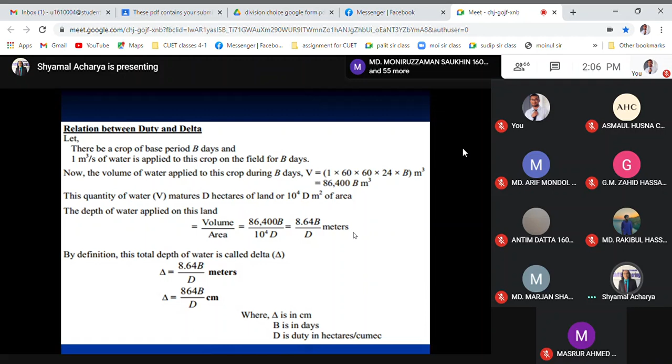And there is a relationship between this duty and delta, depth of water and number of hectares of land with 1 cumec discharge rate. And this relation is delta equals 8.64 B divided by D meters, or 864 B divided by D centimeters. And related to this, duty is varying.

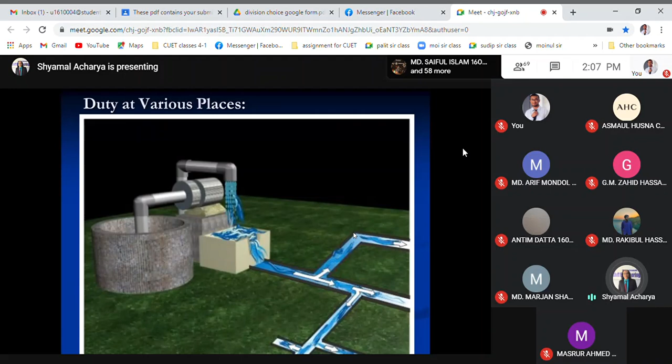The position of the canal system very close to the irrigation field will give you the maximum duty, and the farthest position will give you less duty, because there are different types of losses in between the passages in the canal system. So at source the duty will be less. Close to the irrigation land, that will give you the maximum duty.

And importance of duty was discussed, and we could also improve the duty of water by taking two types of precautions: in field preparation and sowing, and also precautions in handling irrigation supplies, we can minimize the losses.

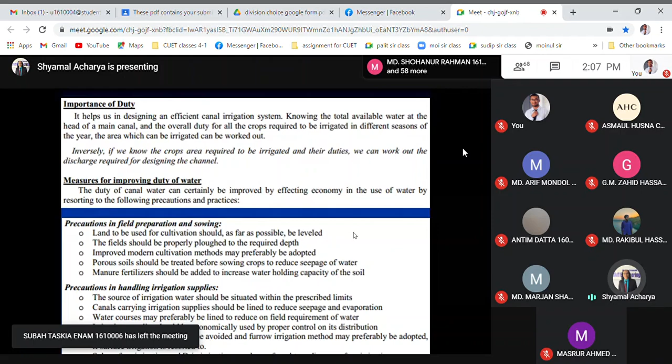Now, each crop has its own sowing and harvesting seasons, and it is important to have the knowledge of this, which may help to decide the total water demand in the field having mixed crops. You might know this, there are two main seasons, Rabi season and Kharif season. This is actually the starting of the Rabi season. Not right now, it started a few days back.

Rabi crops are, say, potatoes or cabbage, cauliflower, these types of vegetables. Brinjals, radish. All these types of vegetables are basically called the Rabi crops, which actually need maximum irrigation water. Without irrigation, it is not possible.

But the Kharif season is mainly in monsoon times, and mostly the water is coming from the rains. As you know, in our country, after April up to October, we can see the rains. And after October to March, or even up to the mid of April, there are no rains, only superficial rains in our country.

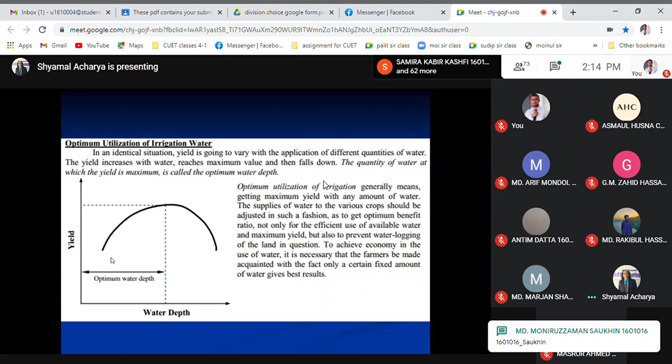The quantity of water at which the yield is maximum, that amount of water is basically called the optimum water depth. I already gave you one example of this type of experiment in your level 3 soil course, that is maximum dry density versus optimum moisture content. This is more or less the same. Optimum water depth gives you the maximum yield. Less than this depth of water will reduce the yield of your crop.

Now come to the use of water. Basically, for the consumptive use, this is called the CU. And this consumptive use is basically consumption of the water in the irrigation field or crop field by two processes. One is evaporation, another one is transpiration. What is transpiration? Can anyone tell me?

Transpiration, as it is written here, is water entering into the plant roots, used to build plant tissues, and being passed through the leaves, the stomata, of the plant into the atmosphere. This process of water transportation is called transpiration. The water enters the plant roots, then gradually moves upward, building the tissues of the plant, and finally through the openings of the leaves, called the stomata, leaves into the atmosphere.

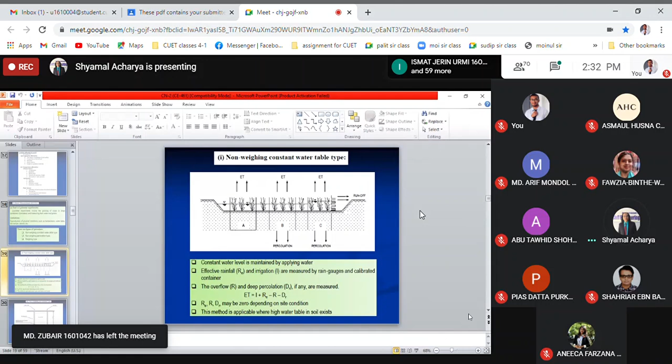Overflow, deep percolation, if any, are measured using this equation. Maybe 0 effective rainfall, overflow maybe 0, and deep percolation maybe 0. This method is applicable where a high water table in soil exists. This is the non-weighing type with percolation.

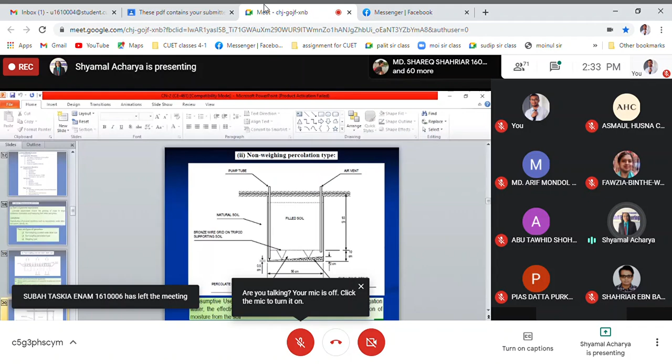Consumptive use in this way can be computed by adding measured quantities of irrigation water and the effective rainfall received during the season from the rain gauge and the contribution of moisture from the soil. And this is that equation. There is MBi and MEi, moisture content at the beginning of the season in a particular layer.

This soil zone can be divided into a number of soil layers. In a particular soil layer, how much water is available can be measured by a moisture content experiment, by calculation of moisture content. And this is done at the very beginning of the season, and after the season once again the moisture content is calculated.

So there could be many layers, 1 to n layers, the difference, multiplied by the apparent specific gravity of the ith layer and the depth of the ith layer zone. This will give you the difference in moisture content, and irrigation water, effective rainfall, and deep percolation. This is addition, this is used, and this is the remaining. So this will be the amount of calculated evapotranspiration.

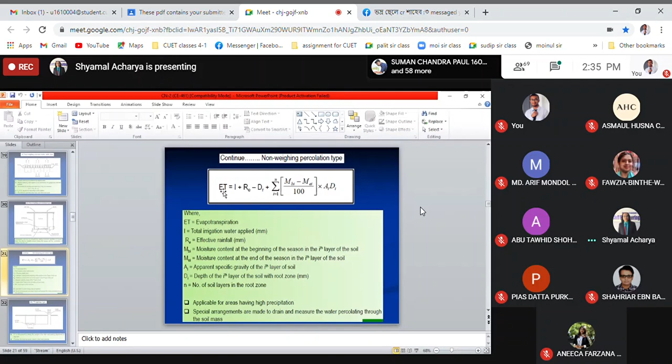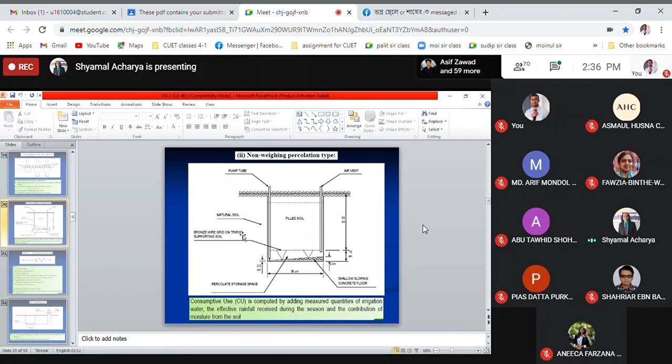There you can see application of water or rainfall. There could be some surface runoff, there could be some deep percolation, and there will remain some moisture in the root zone, and at the same time evapotranspiration will be happening. And knowing all this, irrigation water, how much water you are applying, you can easily measure.

Runoff, the amount of water that is running off from the surface of the land, you can easily measure. Rainfall, if there is anything, from the rain gauge you can easily measure. Deep percolation, knowing the permeability of a particular type of soil for a particular irrigation field, how much water could be percolated into the deep percolation zone, you can easily calculate.

And remaining moisture content can be calculated the previous way. Moisture content at the first sampling time in a particular layer, and moisture content in the second sampling. This could be at the start of the season, this could be at the end of the season. In between, how much water is depleted, that would be the available moisture in that particular zone.

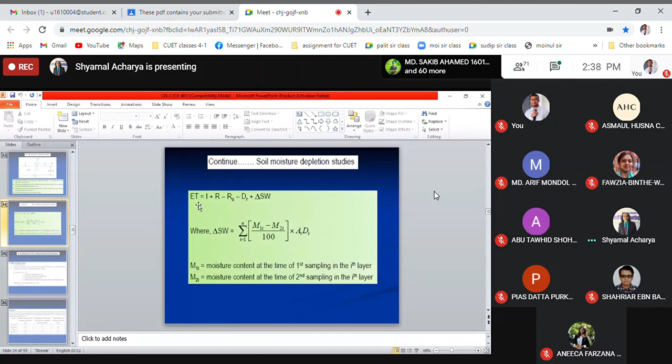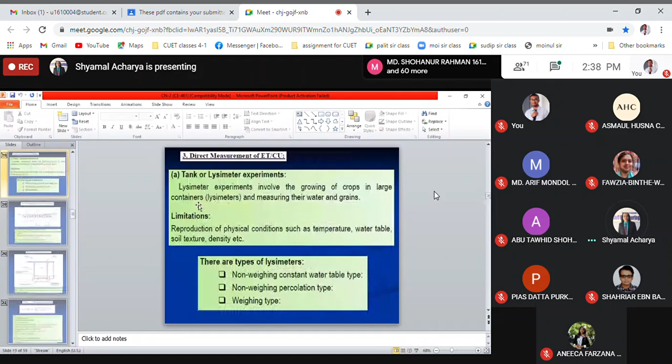By applying some empirical formulas, you can also calculate the evapotranspiration. These are the experiment methods. And without experiment, some empirical formulas are also there to calculate evapotranspiration. And one of these formulas is a very common one, the Blaney-Criddle formula. It is used extensively. It gives a good estimate for seasonal water needs under arid conditions, as it was developed initially. But some limitations are also there: it is not suitable for a period shorter than 1 month.

So monthly consumptive use in centimeter, CU. There is one crop factor, and this crop factor will definitely be different for different types of crops and can be determined by experiment. Mean monthly temperature in degrees Celsius, T. Monthly percent of annual daylight hours that occurs during the period; in our country it can be known very easily because we know about the environmental situation of our country. Our department of environment can give you this type of data easily.

Okay, so if the term in the bracket except the K, from P to the term in the bracket, you take out and represent as F, then CU, consumptive use, can once again be written in short as KF. Depending on these equations, you can see some problems in your book, Irrigation and Hydraulic Structures by Santosh Kumar Garg. You can determine the evapotranspiration and consumptive irrigation requirement of this particular type of crop.

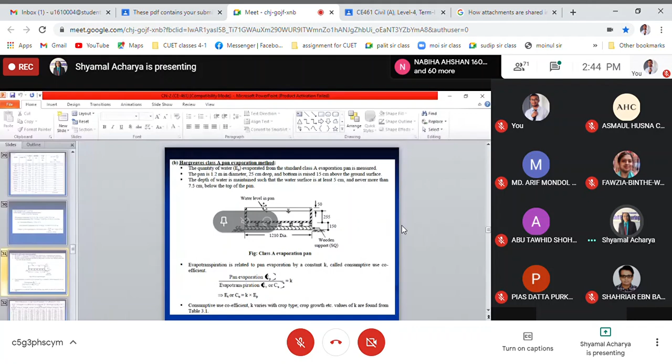So we started to see the empirical equations to calculate evapotranspiration. One is discussed, that is the Blaney-Criddle empirical formula. Another one is the Hargreaves class A pan evaporation method. You can also see these equations in your book. And depending on these empirical formulas, you can see some solved problems or examples in your books as well. And also the Penman-Monteith equation; using these three empirical formulas, you can calculate evapotranspiration.

Also, you can calculate the evapotranspiration by experimental methods using lysimeters, as I already discussed. Lysimeters are of three types: constant water table, percolation type, and weighing type. Constant water table and percolation types are non-weighing types. So depending on the arrangement or facilities, you can calculate the evapotranspiration either by experimental method, or if you have sufficient data, you can use the empirical formulas.

So by knowing the evapotranspiration, you can predict how much water is to be supplied to the irrigation field, and these data can also be utilized in later segments of this course, so that you can get some ideas for the designing of canal systems. Okay?